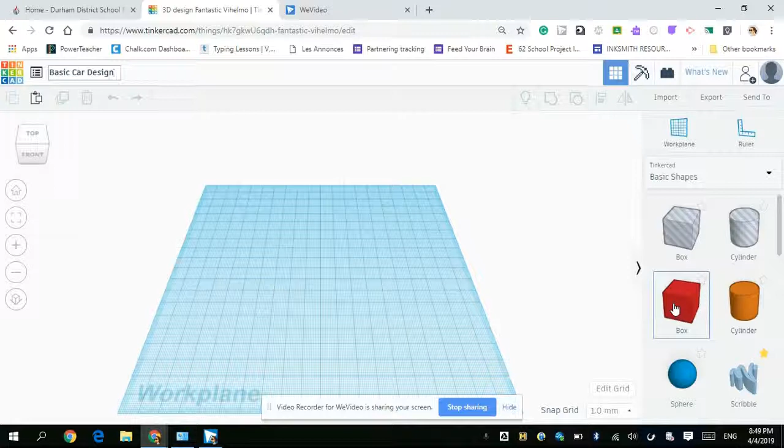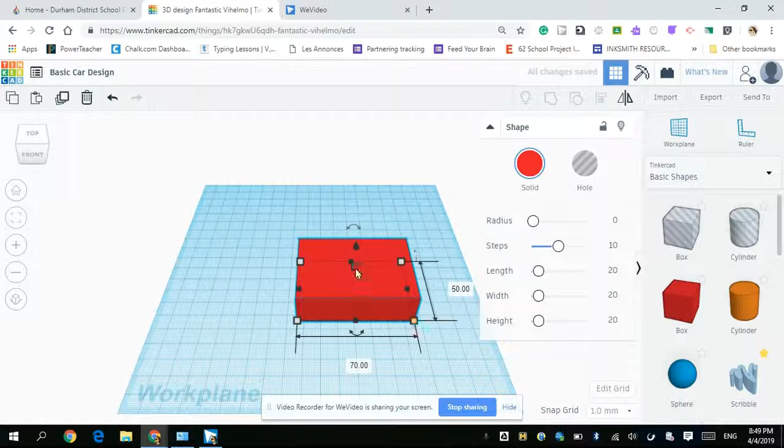The first thing I'm going to do is get the body of my car. I'm going to choose a box for my body. And I notice right now, if I go on top of the little white squares, that this is a 20 millimeter by 20 millimeter box. That's a little small for my car, so I'm just going to make it a little bit bigger. I'm going to go for 50 by 70. And I'm going to make it just a little bit taller as well. Instead of 2 centimeters or 20 millimeters tall, I'm going to go for 30. If you have any particular design constraints that you need to do for yours, feel free to choose different numbers.

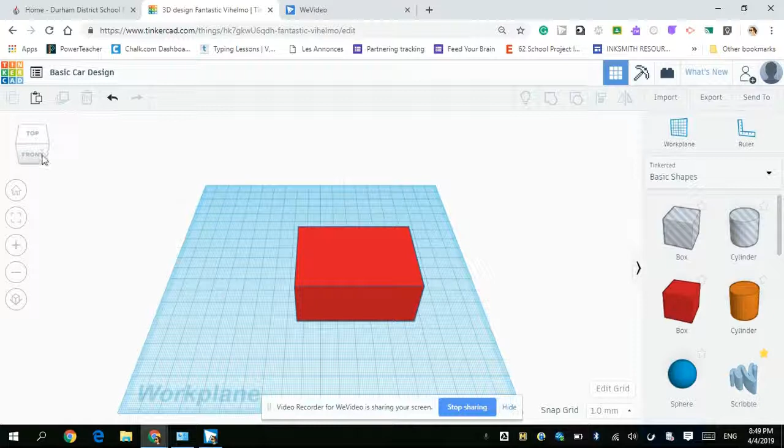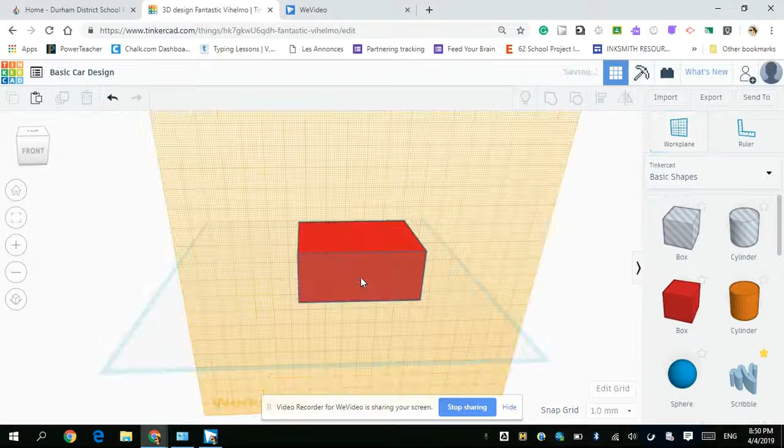The very next thing I'm going to do, and one of the harder parts of the vehicle, is to put the axles on. My axles, I'm going to use those so that I can put the wheels on so that the wheels will actually be able to turn. I'm going to choose a cylinder for my axle, but if you'll notice, if I just bring it right out, it's in the wrong orientation. I could move it around, but there's an easier way. I'm just going to get rid of that one, and I'm going to change my work plane. This is like changing my floor. It's changing where I'm working off of. Now, when I bring the cylinder over, you can see that it's going in the direction that I would like.

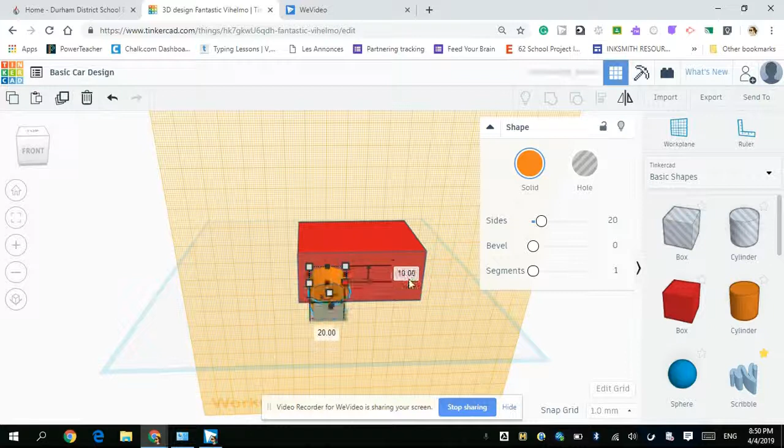Again, I'm going to check on the size of my cylinder, and the basic is 20 millimeters by 20 millimeters. That's a little large for my axle. The axle needs to be small enough that the wheel can go on top of it and still turn easily. I'm going to go for 10 by 10. It's important that they are the same, otherwise it's not so much of a circle anymore, and it just makes it a little harder for everything to roll around.

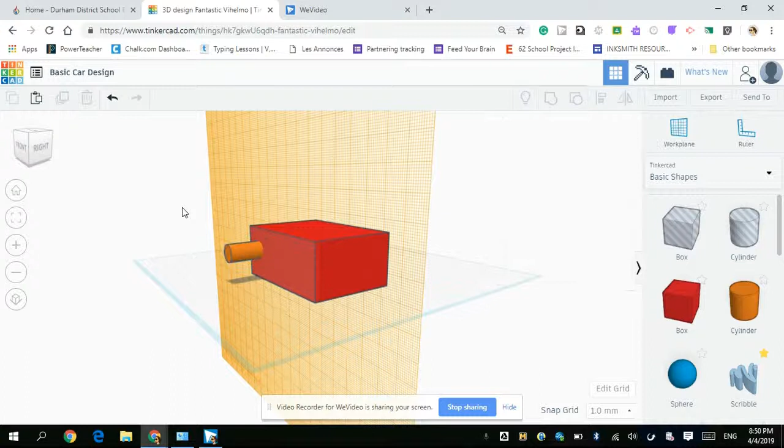As you can see right now, my axle is fairly high up on the car. That's not the spot that I want it to be on, so I'm just going to move it down. It doesn't have to be all the way down or underneath. It can be if you want, but in terms of making it easier to print out, I just want it to be partly up here. And I'm going to make sure that my wheel is big enough that the wheel itself will contact the ground.

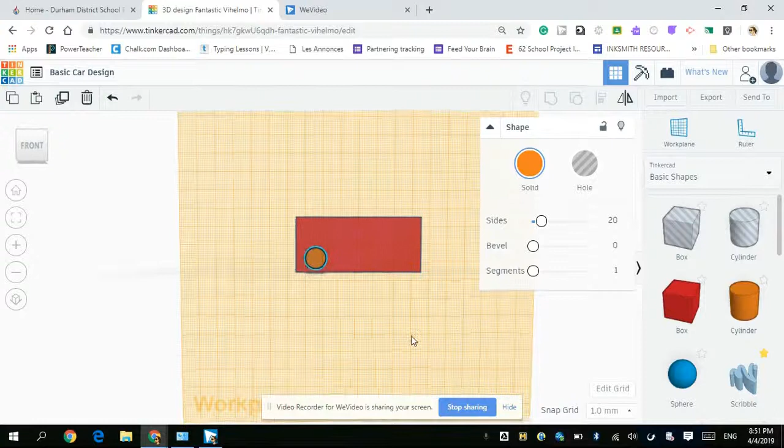Now I've got my axle and it's touching right on the very edge of my car. I'm going to push it back just 2 or 3 millimeters using the arrow at the top to make sure that it's really well seated. If I want this to be longer than 20 millimeters, and now only 17 is coming out, I can make this a longer axle.

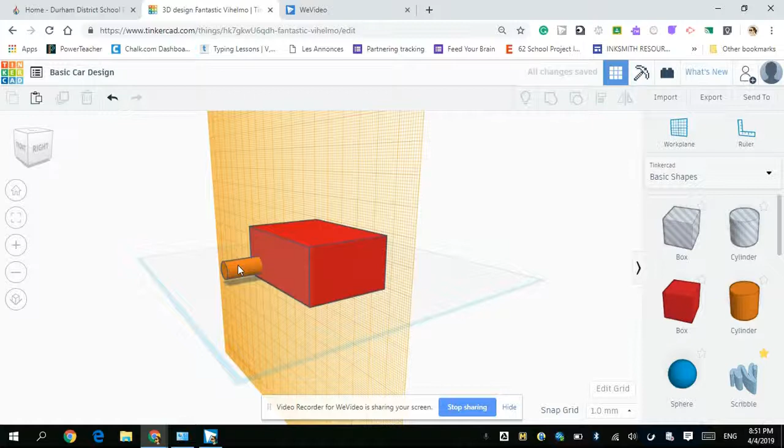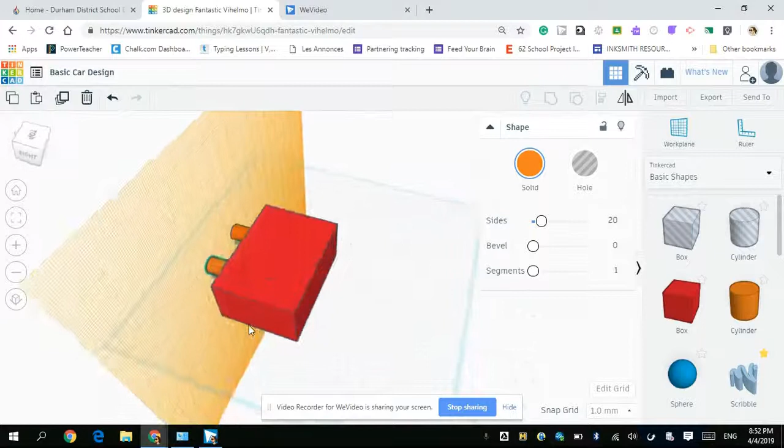If I am happy with my work, if this is the size of the axle that I would like it to be, instead of having to do the same thing over and over again, I'm just going to go to the duplicate button at the top, push it, and now I can move that over. And it's already at the same depth that I would like it. This is half my work done for the axle already. I'm going to now move my work plane over. You could keep your work plane the same and just take this all the way through, but in terms of knowing exactly how far you're in, it's just a little easier if you work on this side. I'm going to, again, hit my duplicate button.

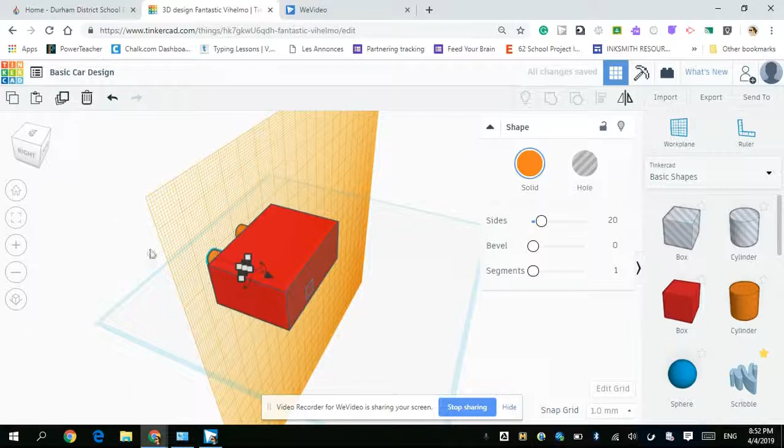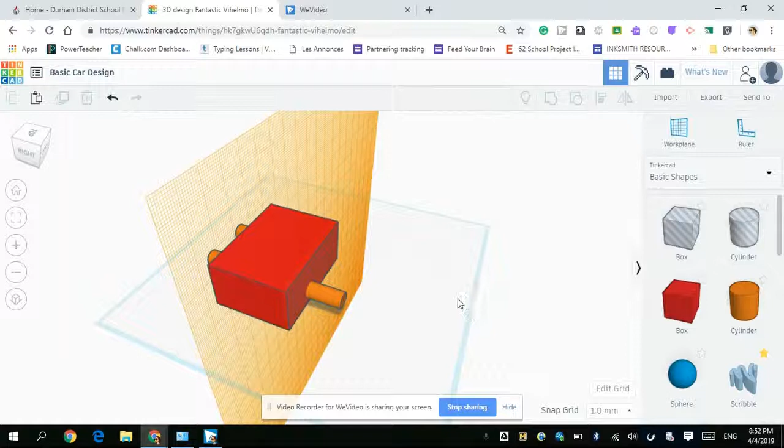And then I can bring this over to the other side. So now you can see that my negative is associated with this side of the work plane. So again, I just want to go back down to about -3. So I dragged it all the way through, so it's at exactly the same distance as the same part of the car as the other. But I'm on the other side. Since I'm already on the other side, I'll just duplicate this one, move it down as well.

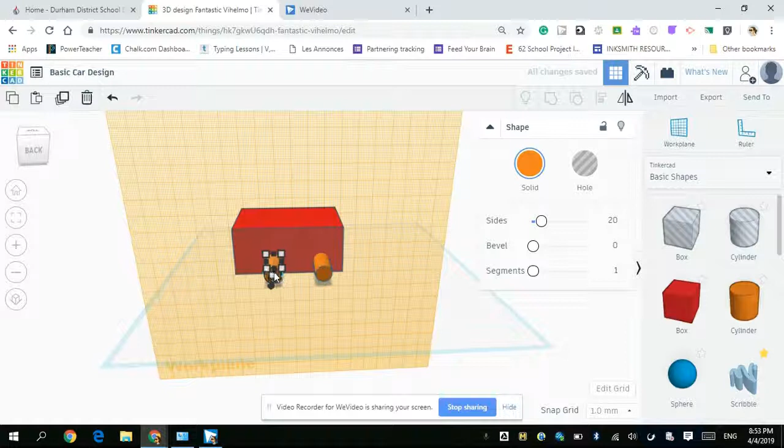I'd like my wheels to actually be a little bit further apart than this, so I'm going to just move that over. And when I'm finished with that, I'll just put my work plane back down on the bottom. Because I moved this one over, I'll just move this one over again as well. It's okay if they're not exactly right beside each other. I like them to be pretty even, but it'll work either way.

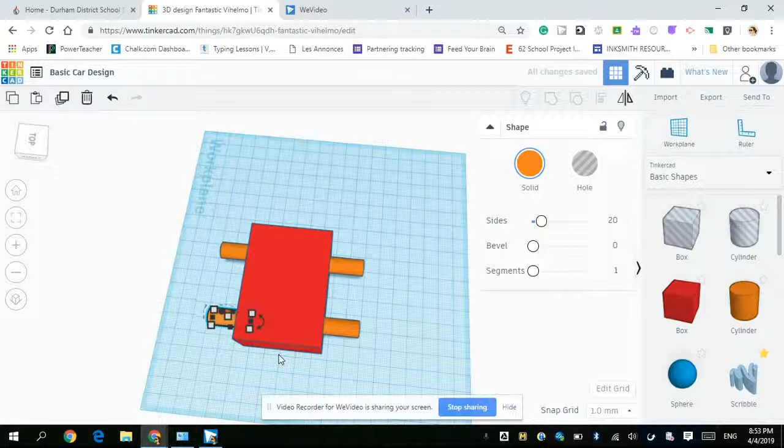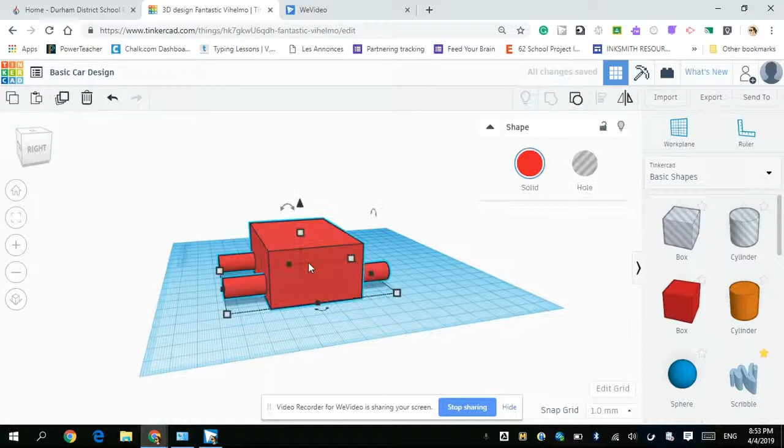So now that I've got my 4 axles for my 4 wheels, I'm going to group everything together so that they stay together. That way, if I have all 5 of my shapes here grouped together into one shape, now when I start manipulating it, if I move it around, I move everything around at the same time, which avoids the possibility of me moving maybe one of the axles by accident and having it floating in midair compared to the rest of them.

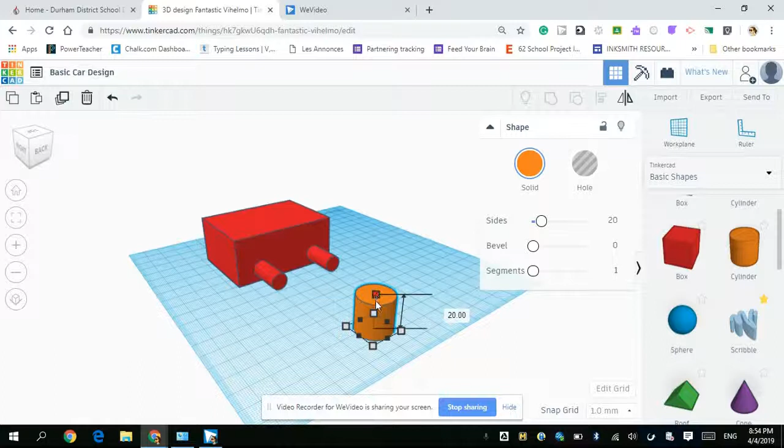So the only last part that I really need is wheels. So for a wheel, you could go and use a torus or a tube. I want to know exactly what the distance of the hole in my wheel is going to be, so I'm just going to use a cylinder again. So I'm going to bring that out. I don't need my wheel to be 20 millimeters tall, so I'm just going to bring that down. I'm going to go for about 8.

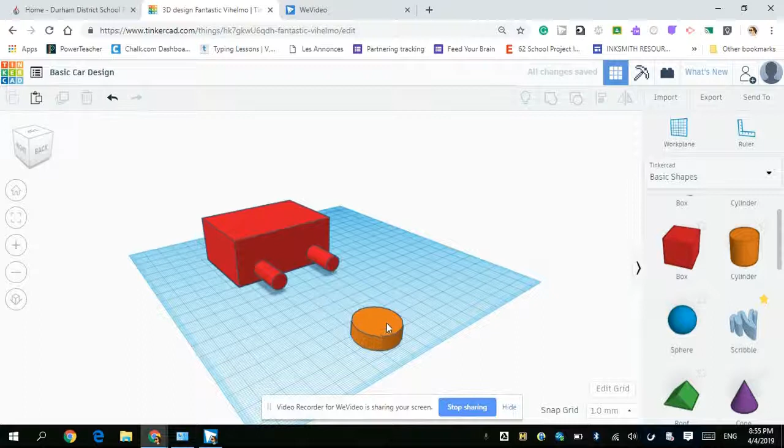And now I want to make sure that my wheel is the size that I'd like it to be. I'm going to say 25 by 25 in this case. I definitely want it to be big enough to reach the ground from where my axle is. And I want them to be the same measurement in both dimensions, so that it is a circle. Now you can tell right now that my wheel is not going to go on very well at this moment because it doesn't have a hole.

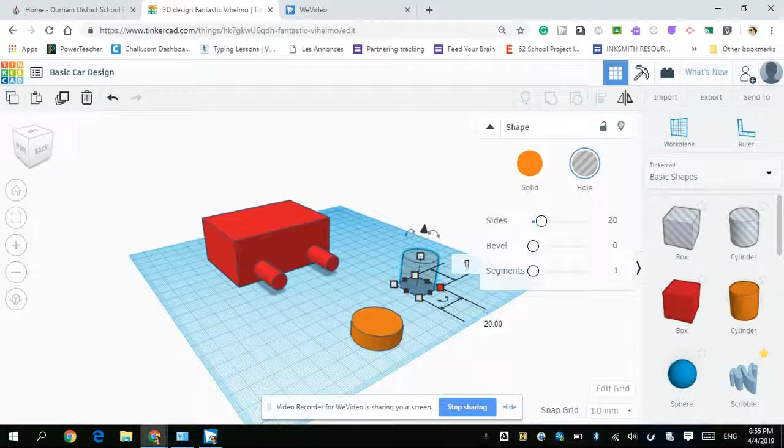So you can either take a cylinder or take a cylinder that's already a hole. I'm going to take a cylinder that's already a hole. If you'll recall, I made this 10 millimeters by 10 millimeters. If I make my hole 10 millimeters by 10 millimeters, it's going to be a very exact fit. And because it's such an exact fit, it's going to be hard for it to move around. So I'm going to make mine a little bit bigger. So instead of 10 by 10, I'm going to go with 15 by 15.

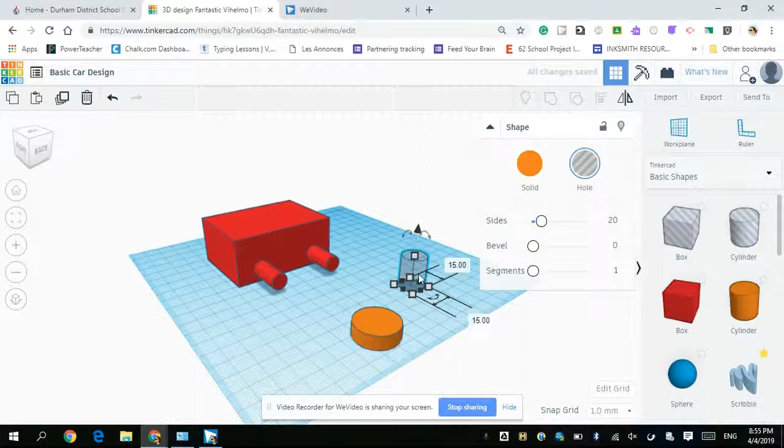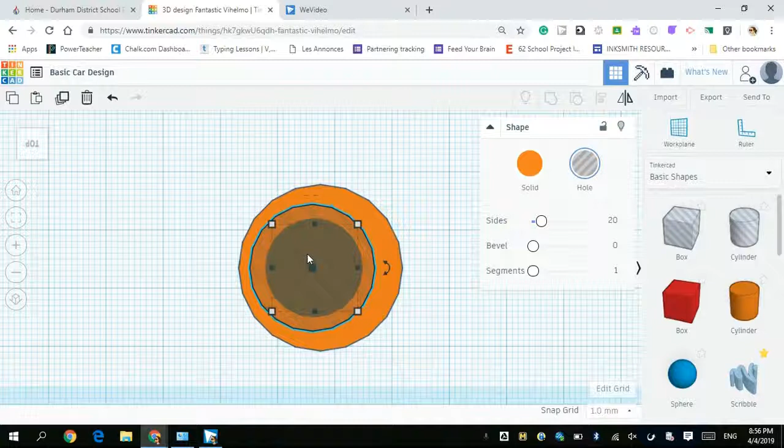And just bring this over to where you want in the middle. I like to look at it from the top so that you'll be able to tell how well it is centered. Zoom in on these two so we can get a better view. That's pretty close to center. When I want to see everything again, just unselect it, and this will bring your entire design into view.

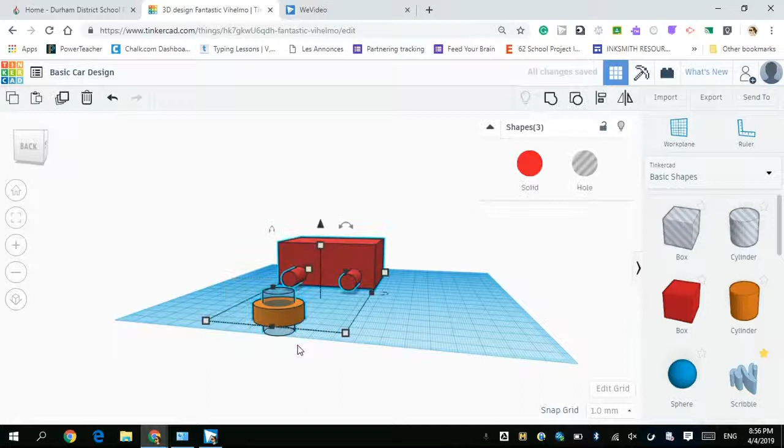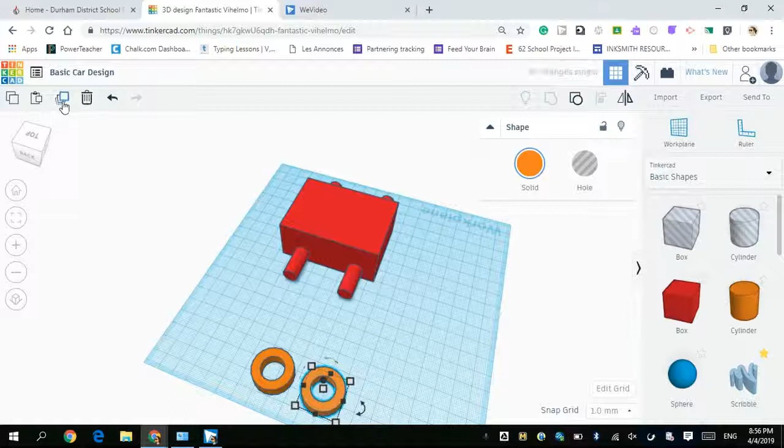Just to make it easy for myself, when I'm trying to make a hole go all the way through, I just stick it all the way through so I don't need to worry about it. Select these 2 shapes. Nope, not the 3 that I accidentally selected. I just want these 2. Group them together, and now I have my wheel. Since I want my wheels to be all identical, I'll just select this one, duplicate it, duplicate it again, and duplicate it again.

Now I've got 4 wheels, a base, and I'm ready to print out my car. Obviously, you can add any embellishments or decorations to your car that you want. Hopefully this one would work.